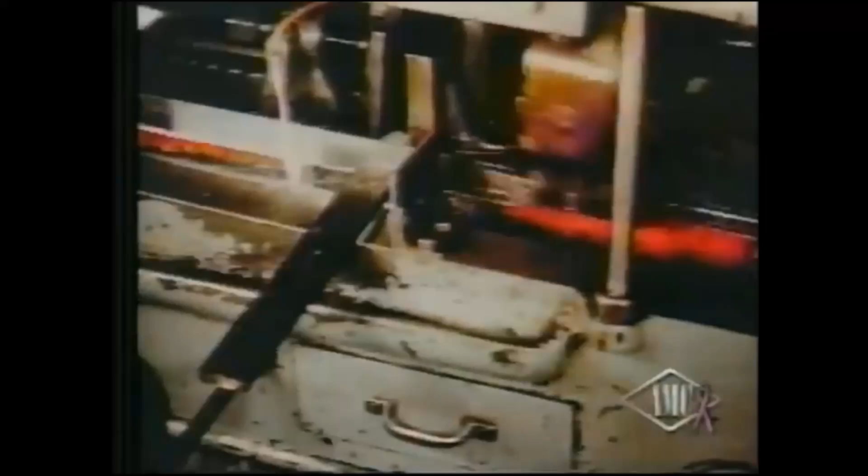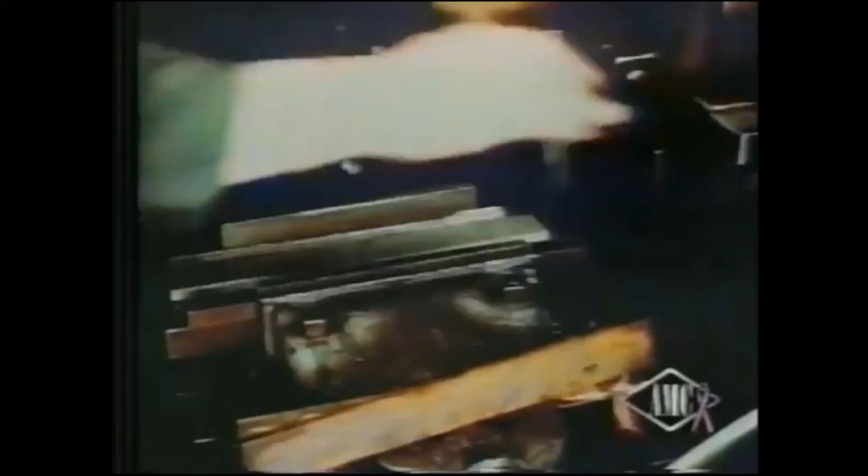Here, master machinists shape blocks of steel that made modern industrial science possible, for they are the world's standard engineering measure, the unbelievably precise Johansson gauge blocks. These operations may appear quite simple, but the cutting and polishing procedures demand utmost skill. The creation of perfect flat planes of steel is one of the greatest achievements of industrial science.

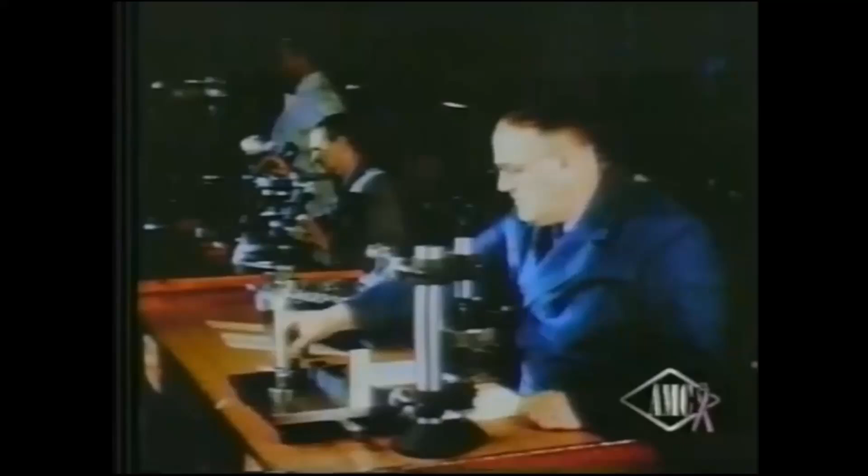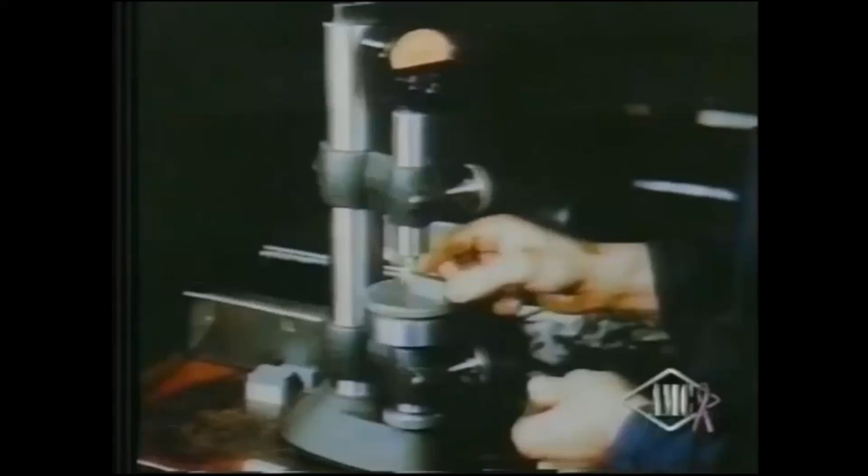Each gauge block must pass rigid spectroscopic tests and be completely perfect, for it is the final authority in all highly accurate measurements. This device, developed by the company's founder, detects an error of 1/25 millionths of an inch in these blocks, which check accuracy of gauges, making high-precision mass production possible.

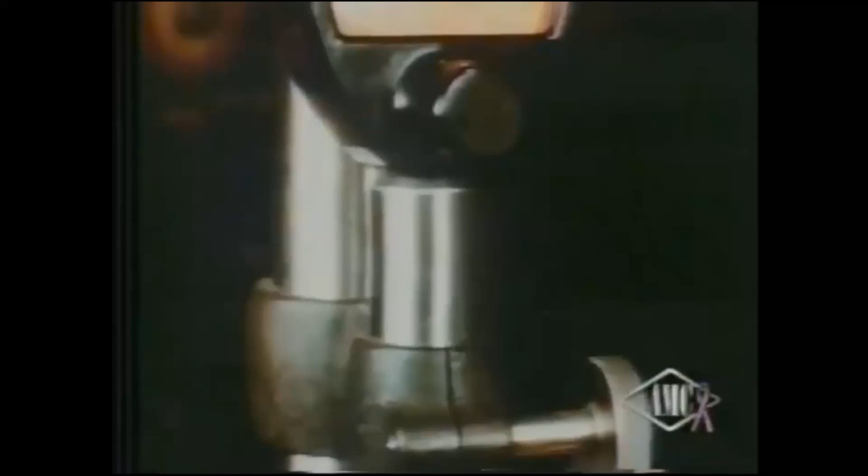Gauge blocks in various combinations are exceedingly sensitive to temperature changes. Here, a cylindrical gauge is being tested. Now the gauge is slightly warm, with this result.

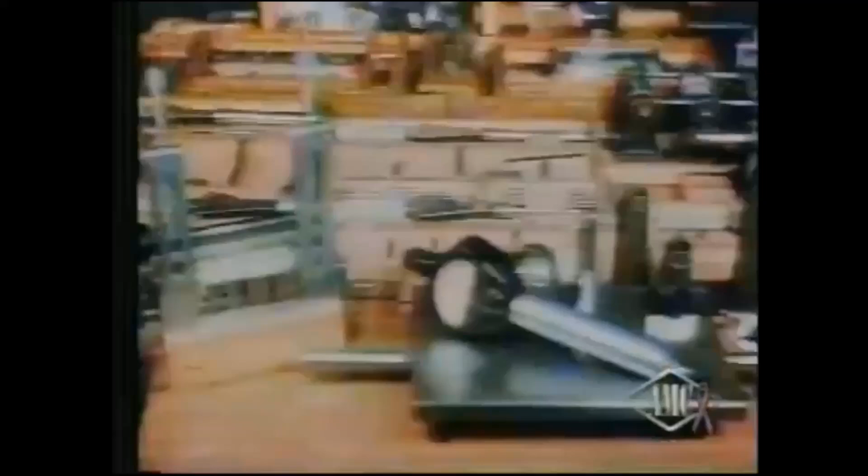This matched set may seem hardly more impressive than a box of children's blocks, but with them we have built our complex industrial world. Endless combinations provide all needed dimensions. Gauges of all types everywhere are tested with these blocks produced in a little Swedish town where half a century ago modern industrial science was born.

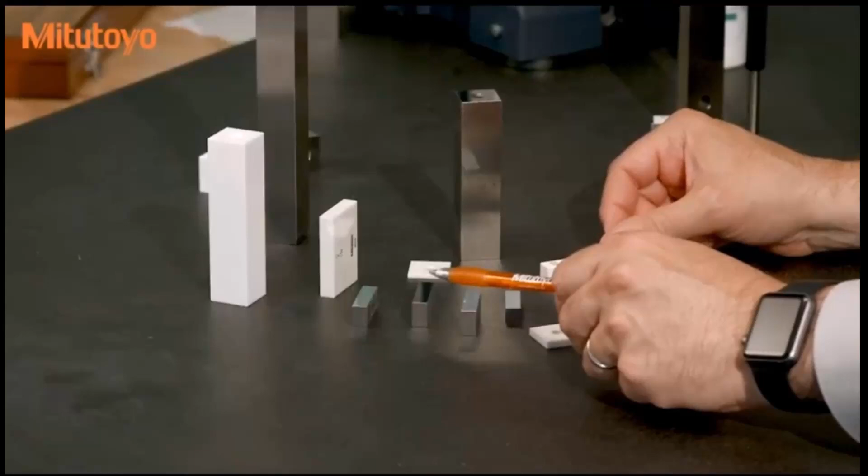So that's a brief introduction to gauge blocks. How do we use them? Gauge block faces are very flat and very smooth. The reason for this is that it allows gauge blocks to ring together.

Without using any adhesive, gauge blocks can be brought together and the flat, smooth surfaces will adhere to each other without causing any damage. When done properly, the gap between the two gauge blocks is somewhere around 1 millionth of an inch. And when you're done, they can be broken apart and reused over and over.

Any flat or smooth surface will ring together: steel to steel, ceramic to ceramic, even an optical flat, such as shown here. I've rung together 4 different gauge blocks: rectangular, steel, ceramic, and an optical flat. All 4 of those blocks are rung together nice and tight.

That's pretty neat. The idea behind Johansson's original patent was the particular sizes in a set of gauge blocks. They allow you to build an accurate stack of gauge blocks to create any length you need. So let's walk through the ringing process. When you ring blocks, you apply quite a bit of force. To avoid scratching your blocks, it's important that they are clean.

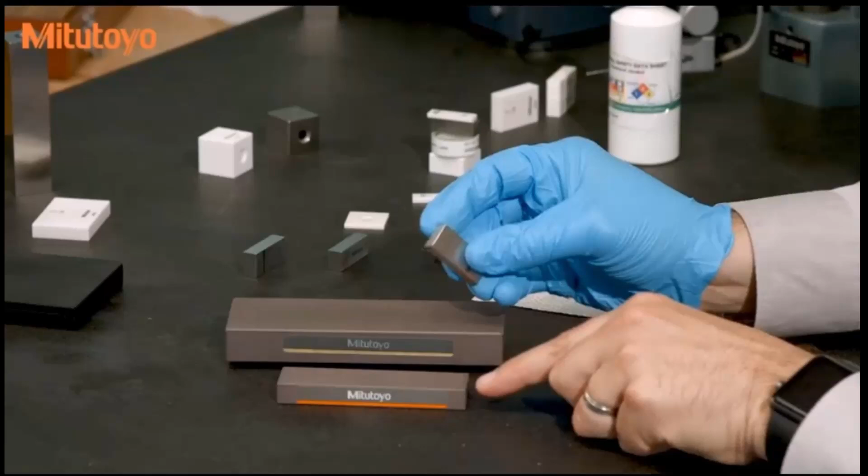First, I'll use some denatured alcohol to clean the block. Then I'll use this Mitutoyo Ceraston to remove any burrs. This is sometimes called conditioning the block. We're not changing the length of the block, we're just removing any high spots, particularly on the edges. I can use a small Ceraston like this, using a push-pull technique, or I can use a large one like this, and some people like to go in a figure-8 pattern.

No, you don't have to buy a Mitutoyo Ceraston, but they do work well. Some people recommend using a small granite surface plate.

It's hard to say how often you need to condition your blocks. It really depends on how you're using them. If you were to very lightly slide a gauge block across a surface plate, you may feel it catch or hear a scratchy sound that indicates a raised spot. In those cases, you should do the conditioning.

I'm also not going to pretend to understand the physics on why ringing works. I'm an engineer, I just need to know that it works and how to do it. In fact, it seems to be a bit debated as to why it really works. We'll leave that for the interested viewer.

What is important to know is that ringing works best with a very, very slight amount of light oil or grease on the gauge block faces.

We really don't use anything special in our lab for ringing. We have these 20-year-old stamp pads lying around that have some WD-40 sprayed on them. Yes, WD-40. I can only imagine the comments that will be posted on our use of WD-40. All you need to do is dab the gauge block in it and then wipe it off on a dry cloth. We don't use any solvent here because we don't want to remove the oil. We want just a little bit left on it.

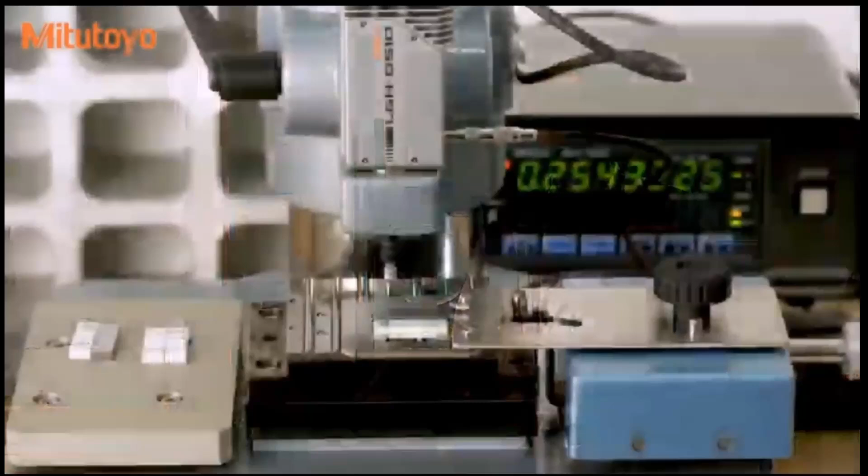Gauge blocks are usually calibrated using a comparison method. This is the master block and this is the customer block to be calibrated. We set the comparator using the master block.

And then measure the customer block.

In accordance to B89.1.9, the length tolerance for gauge blocks applies across the entire surface of the gauge block, not just at that gauge point. The standard discusses the importance of checking the size in addition to the gauge point at all four corners. This fixture moves the gauge block around so we can measure the four corners quickly and easily.

In order to state conformance to grade in accordance to the ASME B89.1.9 standard, all 5 of these points must be in tolerance.

Gauge block calibration practice in the United States is sometimes a bit sloppy. To save calibration costs, some people have been convinced to go with a single point calibration, where the corners are not checked at all. The only time that's acceptable is when you're only using the gauge block at that exact measurement point, and I think that's pretty rare.

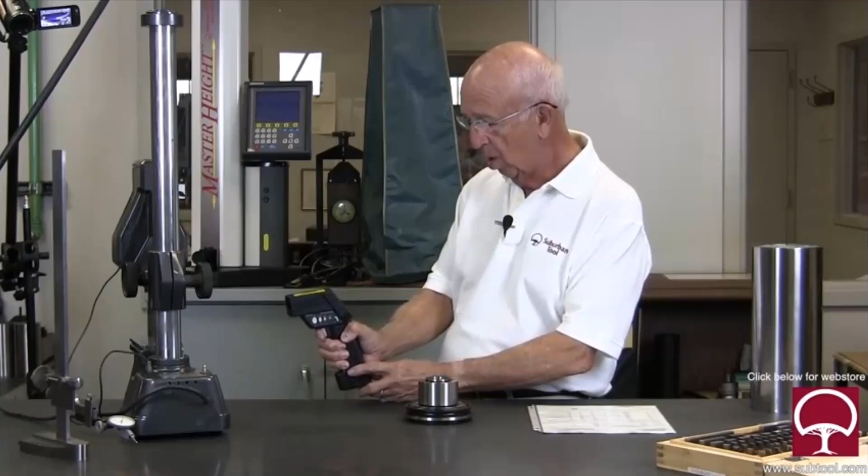So he came out, he took a temperature gun like this, and he said, "Let's take a look and see what the gauge blocks are at or what they should be." And Jim, can you see this? Okay, good. Now let me check the temperature of the gauge block that's stabilized. Can you check that one, Jim?

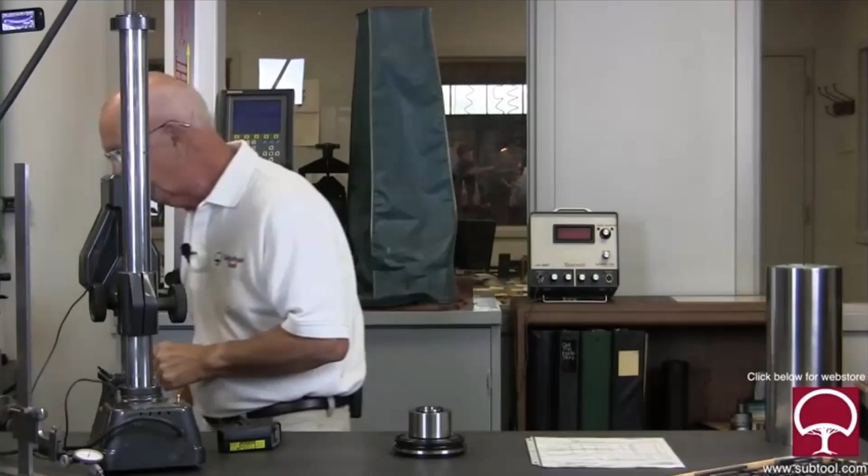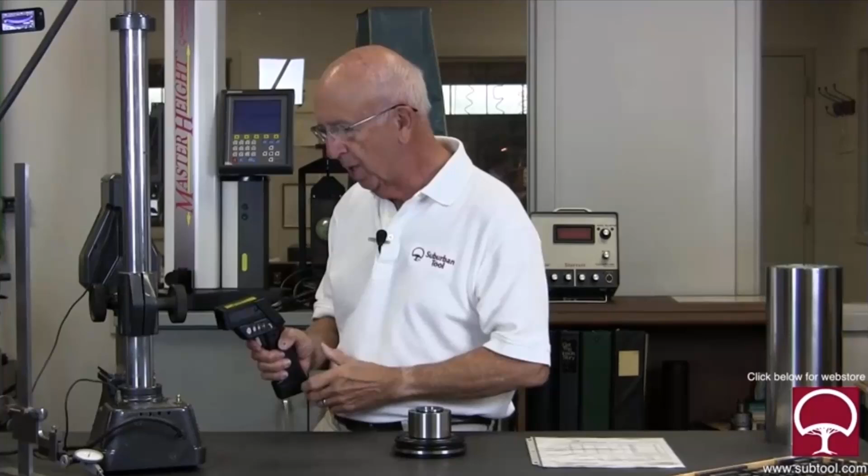All right, so you can see there's a difference in the temperature. The difference in the temperature is approximately 8 or 10 degrees, I think. And that little difference, I'm going to show you the difference here. This is the correct set of gauge blocks.

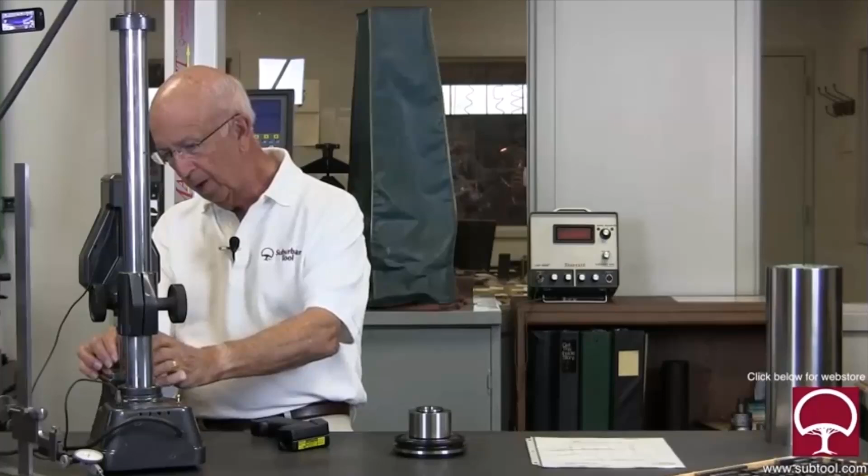That's on 0. This is a set that's warm, and there was no compensation made for deviation. So you can see that's 2.5, correction, 1.5, almost 2 tenths. So the difference between an accurate set of gauge blocks, which is what my boss used, and the stack that I used without compensating for deviation and without compensating for temperature, took 1.5 of my 2 tenths tolerance away.

Plus my part was warm. So add that all together, and I ground those parts undersized, 2.5 to 3 tenths. So I was out of tolerance. Why? Again, not taking into account the temperature, not taking into account deviation, not taking into account the temperature of the part that came off the machine that perhaps was a little warm from grinding.

So that's how important it is to make sure you use the deviation chart and you stabilize the temperature, make sure it gets down to ambient temperature so everything is the same, when you're working within a couple of tenths like that on larger parts.

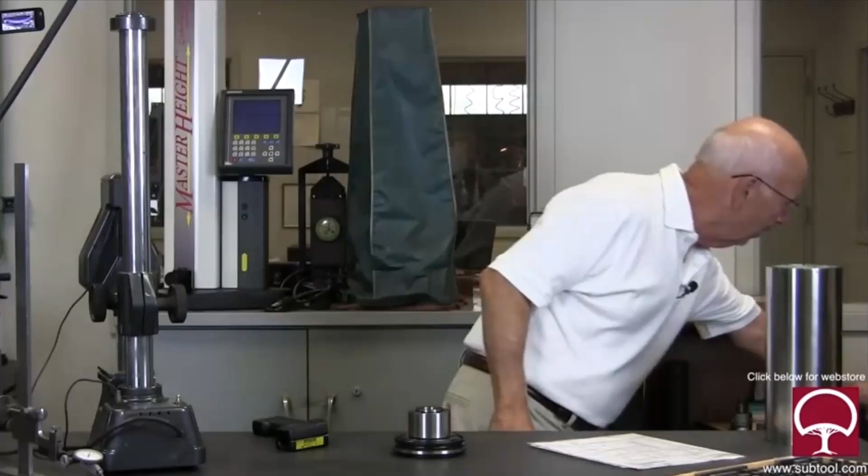Now you're working with smaller parts, such as this one. It's still going to be important, but it doesn't have the mass, so it's not going to grow as much. This part's going to grow much more because it has more mass. So pay attention when you're grinding within a couple of tenths. I don't care if it's flat grinding, cylindrical grinding, ID grinding. Pay attention to temperature and pay attention to the deviation chart.

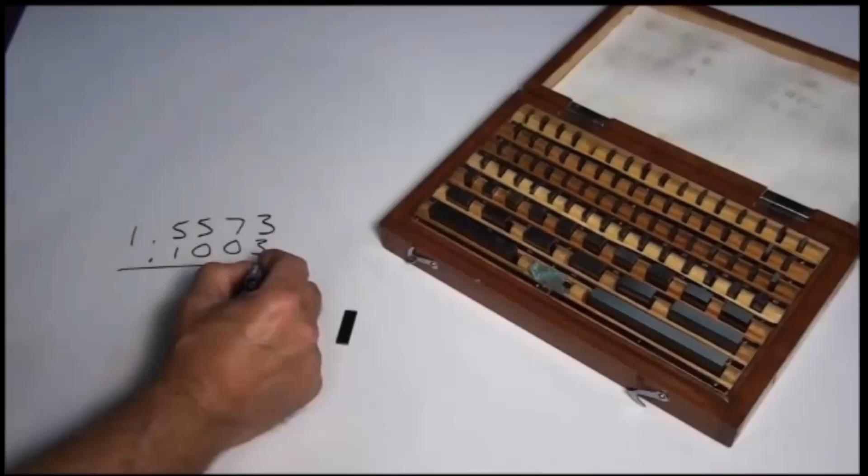Do subtraction. 3 minus 3 is 0. You can see we got rid of that rightmost digit. 7 minus 0 is 7. 5 minus 0 is 5. 5 minus 1 is 4. That leaves us with 1.457 inches.

Look at this right digit again. It's a 7, in the 3rd decimal place over. That makes it 7 thousandths of an inch. There are no 7 thousandths thick blocks in here, but there are 0.107s. Remember, all these center blocks here are 0.101 through 150. So there should be a 107 in there somewhere, right about here. Let's write that one down, 0.107. Do the math: 0, 0, 5, 3, 1.

That leaves us with 1.350. Remember I said these middle blocks here are 50-thousandths increments, so there should be a 350 in there somewhere, and sure enough, 350. Let's write that one down. Subtract: 0, 0, 0, 0. Leaves us with 1 inch. The upper blocks are 1 inch increments, starting with 1 inch.

Okay, so we got our 4 blocks. Hopefully we stack these up, we'll get 1.5573. Alright, how do we make a stack of gauge blocks? Well, first thing we do is clean all the grease off of them. I like to use alcohol, it's a little easier on your hands than petroleum solvents. So wipe all the grease off of them. As I said before, all my blocks are stored well greased so they don't corrode.

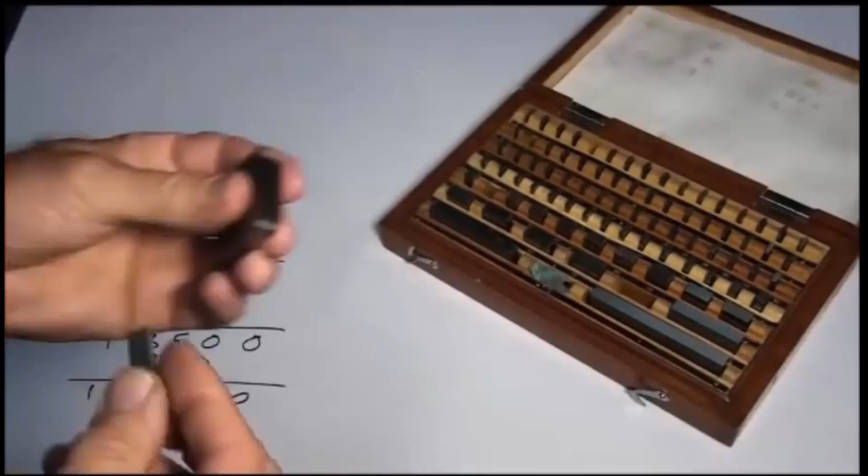Ring the last two together. Alright, that gives us a stack of gauge blocks.

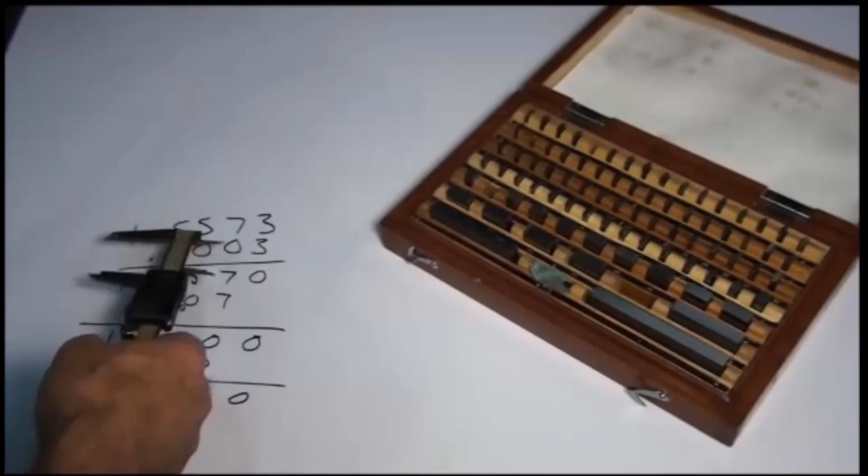I always like to just check them with a pair of calipers as a little sanity check, see if my math is right. 1.557 - okay, we're going for 1.5573. I think I'd trust this over this.

Okay, so that's one example. Let's clean up the board here and take a look at another example. It really needs some dry erase markers, I think.

Suppose we wanted to build a stack of gauge blocks 1.5873 inches tall. All right, same as before, we'll look at this right digit.

It's the 3/10,000ths place, so we'll use the 0.1003 block - that's this one right here. Write down 0.1003, do the math, leaves us with 1.487. Now there's always an exception to the rule.

Okay, this time we're going to have to do it a little bit differently than last time. Remember I said these center blocks in through here are all in 50-thousandths increments - that's 0.05. So if we look at this second decimal place here, when we choose the block to wipe out this 7, we have to keep an eye on the second place. We want to make this turn out to be either 0 or 5 - a 50-thousandths increment.

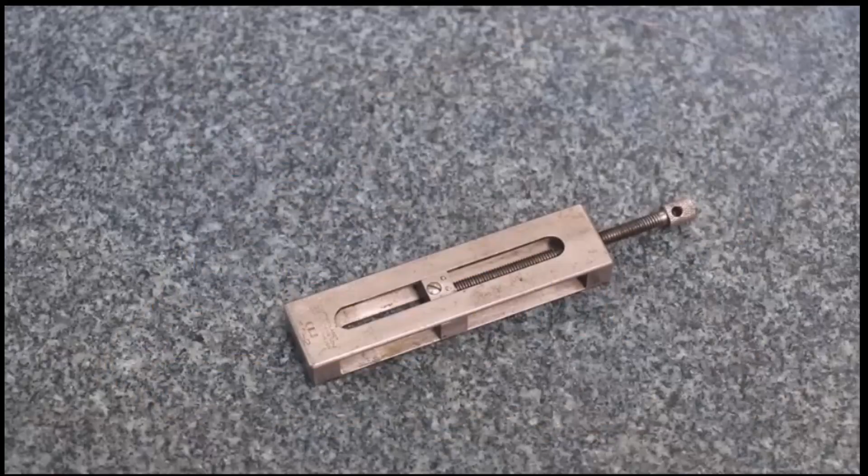So what I'm going to do is put together a little stack here and show you how that would have been used. Let's start with something simple. These tools here, and there's several of these in different lengths, are basically just to help hold a stack together so they don't fall apart. Now in theory, you should be able to ring these together—you squeeze them together and the surfaces are so flat that they stick together. Mine are not as flat as they probably should be. Some of them will ring, some won't.

In this case, let's just say we wanted to make a stack that was 1.5 inches. I'm going to do something really simple here. This one is a 1 inch one, this is a 1/2 inch. You put them together, it's 1.5 inches. So what you can do now is just take the stack, open it up a little bit more, put the stack in the holder here, open it up a bit more, and clamp them down together. And now I have a very precise standard here that's 1.5 inches wide.

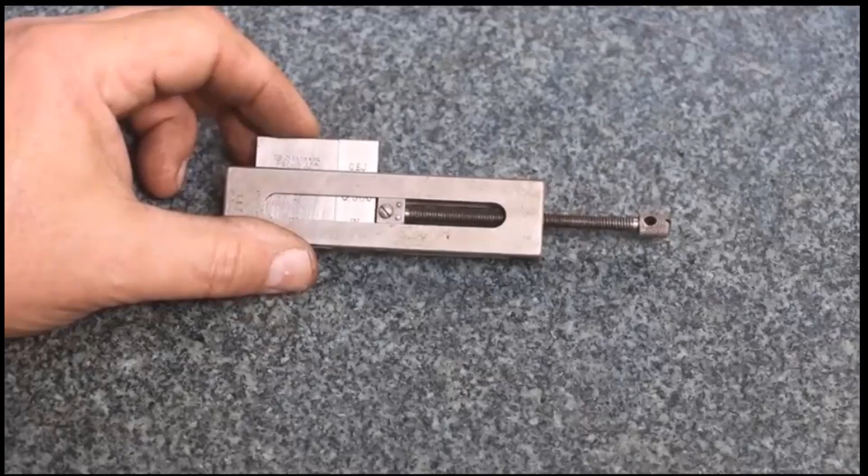Just to verify that, I'm going to take my calipers. We'll come in here, and it's right on the money, 1.5 inches. You could use a micrometer to measure that—it'd be more accurate, I'm just using the dial calipers because it's easy to show. But let's say you just needed that as a reference. Now you've got that stack, and you can put a lot of different gauge blocks in here to get a very precise stack. That's probably the simplest way to use it, but you can also use some of these special ends in here to do some even cooler things.

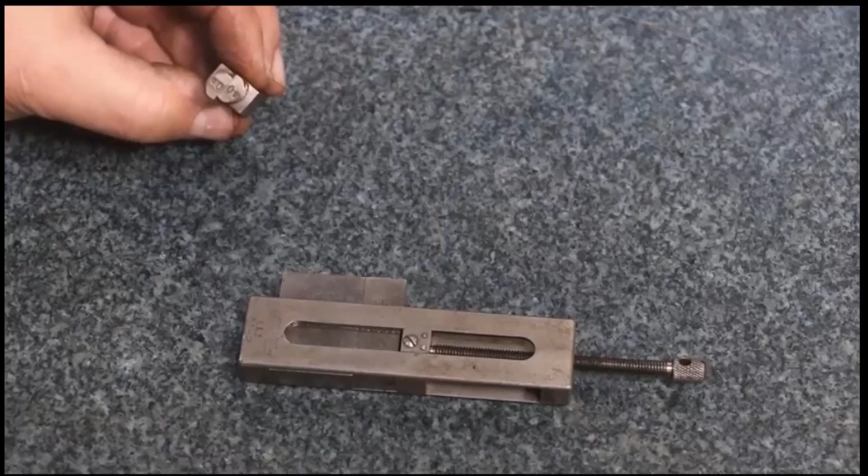So you've got these ends here. There's actually several different versions of these, and if you look, they're round on the ends like such. Now what I can do with these is use this. Let's say you had a hole that needed to be exactly 1.9 inches in diameter that you were boring in something, and you needed a way to measure that with a super precise setup here. I picked 1.9 because I've already got 1.5 inches. These, if you look on the end, you see it's 0.2, so each one of these is 2/10 of an inch thick, and to verify that, we'll just use our calipers—2/10.

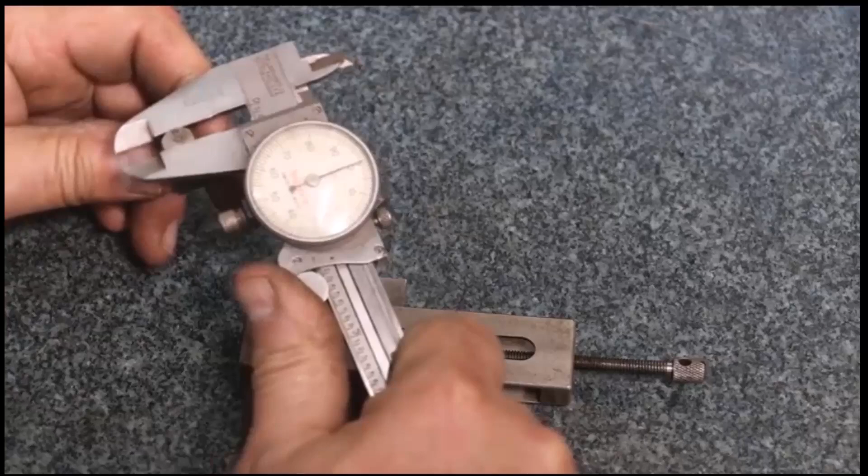So I'm going to take this stack apart. We're going to put these on either end. We'll take this one, put it on the bottom. We'll take this one, put it on the top, like such. Now I can go over to a hole and see if that fits.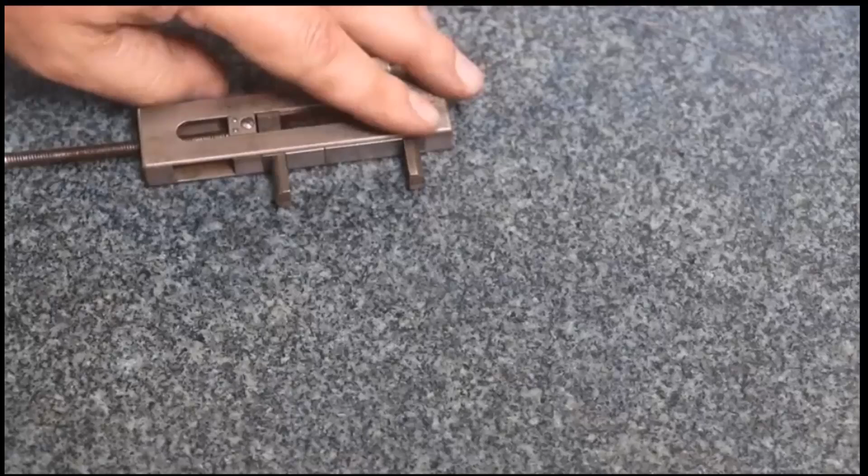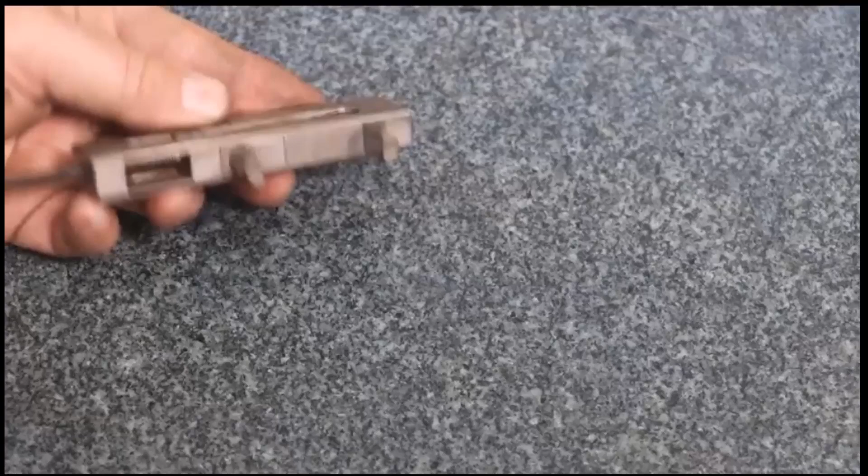Now, probably what you would have done is had multiple stacks. Usually when you're doing something precision like a bore like that, you would have tolerances—it would have to be within a range. So let's just say we're at 1.9 inches plus 0 minus 5, or 5/10 thousandths or whatever. You come up with 2 stacks and you could check it with a go, no-go gauge. Basically, if one of them fit, it was a go; if it didn't fit, it was no-go. So you could use this for doing inspection work by setting up a couple of different stacks with different measurements. That one's for doing an inside hole measurement, and you could just run it in there.

Again, two stacks. You see if it fits or it doesn't fit.

Next thing we're going to do is show how to turn this into a height gauge for making very precise height measurements. There's all kinds of height gauges that are adjustable, moving up and down, but this is a case where you wanted something really set up super accurate using the gauge blocks as a reference. You would use this stand here, and first thing we'll notice on here, it says 1.375. It tells us how high. Basically, this stand becomes a gauge block.

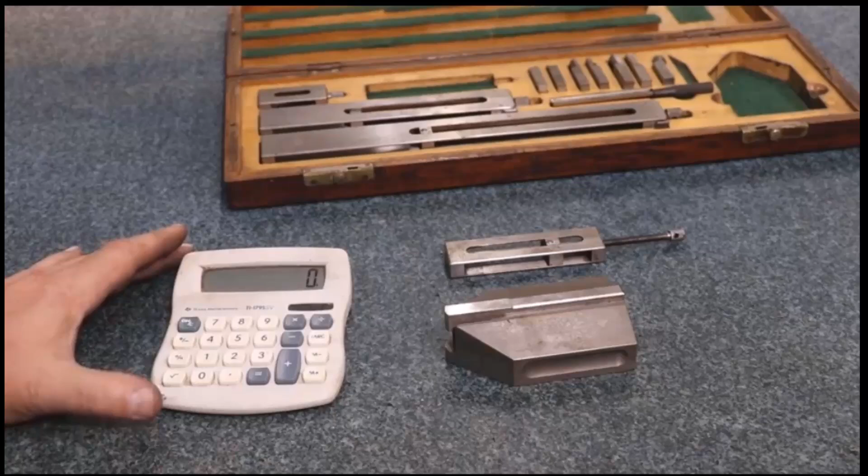Let's say I want to put a scribe at 2 inches high. I'm going to get a calculator to make this easier. I'll put in 2 inches and subtract the 1.375. That tells me I need to put 625 thousandths in there.

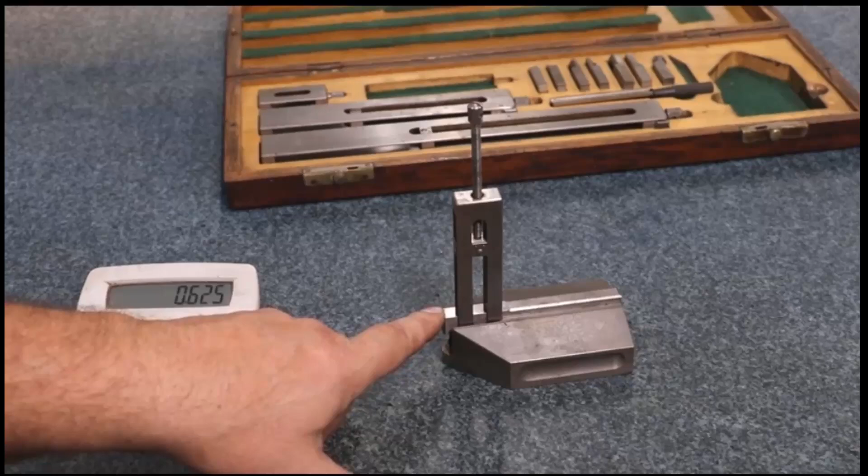First thing I'm going to do is take my little holder here. There's just a little spring clip on the bottom. It goes in there. That height I just told you, the 1.375, is from here to the top. We can start stacking our gauge blocks on top of that. So if I want to go to 2 inches, I want to really start out here on the end to get my measurements.

I got 625 thousandths, so I'm going to grab a gauge block here. The 25 thousandths is too thin for a gauge block, so this is 125 thousandths. I'm going to subtract that out: minus 0.125 equals half inch. So now I grab my half inch gauge block, and when I put all these together inside over here, it's now 2 inches up to the top.

So 2 inches from the plate up to the top. I will finish by just putting in a little scribe here. The scribe is flush on the bottom, so the point down here on the end is going to be the same height as the top of the gauge block. We tighten it all down.

Now I have a 2-inch stack for a height gauge, and then I can go over to another piece of work—I'm not going to actually do it—but scribe a line on there if I'm doing a measurement, or if I need to come in there even and measure across the top of something, I can sweep it and see if it's at least below that.

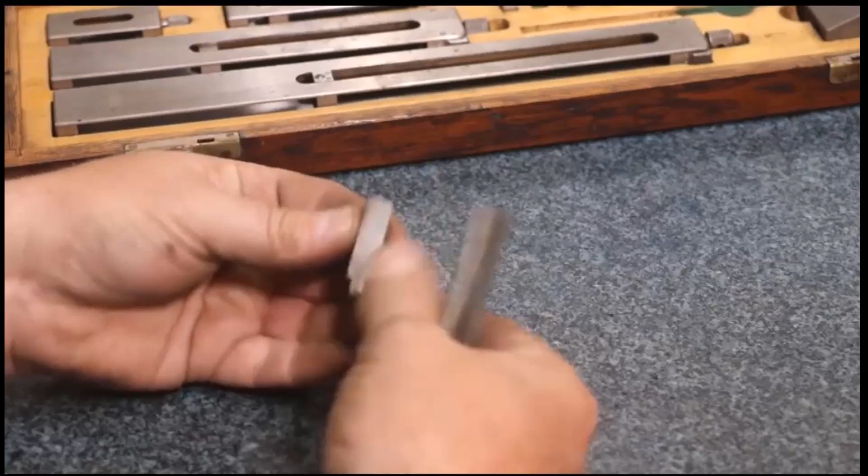Another tool that's in here is this little scraper. This is a little triangular shaped 3-sided scraper, and basically what this is for is to come in here and scrape the top of your surface—not trying to remove metal, but a lot of times you would use grease on these gauge blocks to help them wring together. So you can just use this to quickly get that surface cleaned off and flat again, and at the proper height. That's also included in the accessory kit.

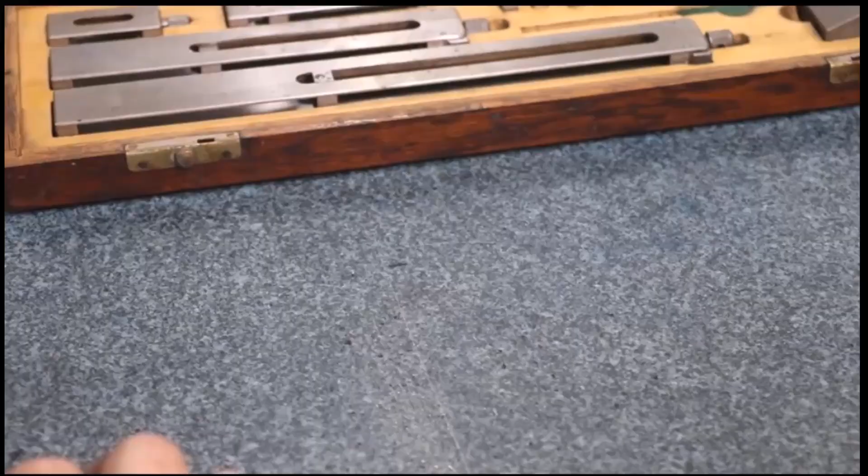So there you go, just a little bit about the Johansson gauge block accessory kit. These are out there, you can find them. You see them come up for sale on eBay from time to time. I don't recall where I got mine—this may have actually been an eBay purchase at one point in time. It seems like I remember purchasing this off eBay, or I may have got it at an auction or someplace else. I really don't remember, but they do come up. I wouldn't say they're super common, but if you look for them, they're out there. And probably by me doing this video, the price just went up on them. That seems like the way it usually works.

But anyway, I had a viewer ask about it, how it was used. And guys, I am quite sure that there are probably many more ways that you can use this than what I just showed, but those are some of the ways that I know how to use it. I have used this set for doing exactly the kind of stuff we just talked about.

Well, there you go guys. Just a little quick video on how to use the gauge block accessory kit and a little bit about gauge blocks in general. These are extremely handy tools to have in the shop, particularly the gauge block set. I use these a lot. Probably the biggest thing I use them for is when I'm setting up a sine plate. If I'm over on the grinder or something like that, I can use a sine plate to get a very precise angle. I can calculate a stack that needs to go up underneath that, and I use the gauge blocks to set that sine plate with.

But they have so many more uses, particularly when you start getting down and doing super precision work to the ten thousandth of an inch level, you need to have some of these just as references to use in the shop. Very critical to have that, and tool and die makers really rely on these quite a lot. Honestly, most of the work I do is probably not to the level of precision that I need these for, but every now and then jobs come in that you need them for.

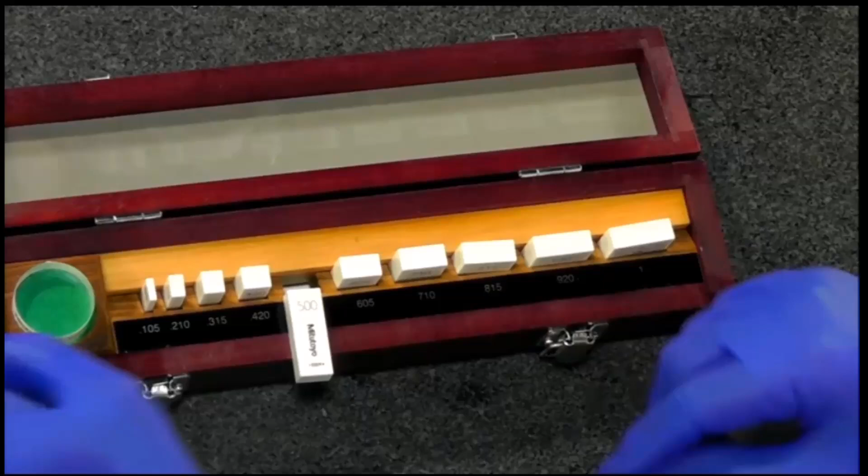The dimensions printed on the blocks, black on white, out on the shop floor, especially with my eyes, sometimes trying to find the number, you've got to keep rotating it back and forth, get the light to reflect off it just right. See, just right — with this one, you have no doubt what block you're dealing with.

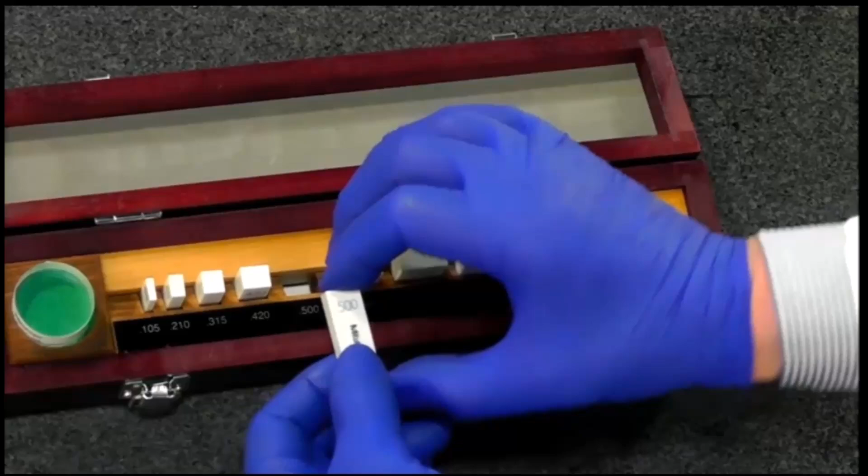These are fantastic, but you have to be very careful. You don't want to drop them. But will they — I think a ceramic plate, if I drop it, it's going to shatter into a million pieces. Right, these are not that. These are very durable. They've made them so they can survive the shock of being dropped. We don't recommend that, that's not good practice, but if it happens, your 1-inch block won't end up as 300 thousandths blocks. They will not shatter or break.

They're non-magnetic, which is another advantage of ceramic. Steel gauge blocks can become magnetized — we have to demagnetize them occasionally when we calibrate. They can attract chips and metal flakes. These won't attract anything. The grain structure is very tight and dense with ceramic, so they tend to ring better together. When you're ringing them, they'll ring a lot easier than steel ones, and the contact is much tighter.

Now, when you ring gauge blocks together, it's always advisable at the end of the day to pull them apart. Why is that? If there was any contamination, especially with steel gauge blocks, they can oxidize, rust, a number of different things — if there's any coolant, that sort of thing. Also, dimensionally, I don't have the specifics, but I know NIST never recommends ringing if you don't have to, so surely don't leave them that way.

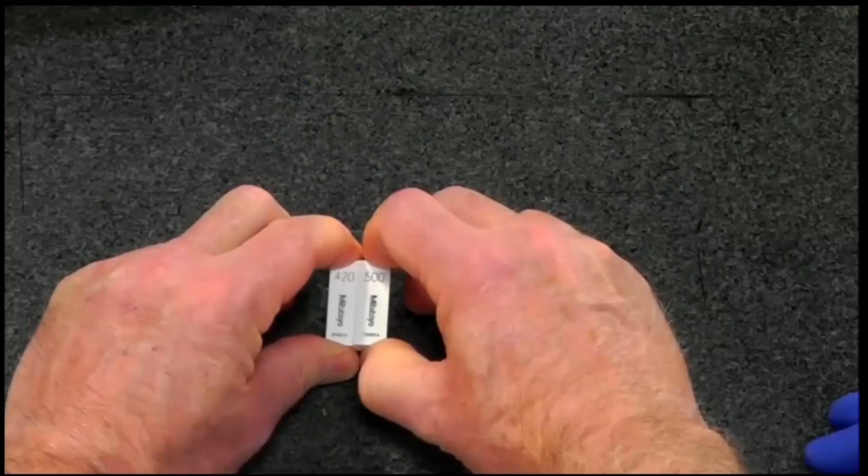Oh man, you can do it, but it takes quite a bit. And actually, the thing that's weird — wow, those are really... The only way to get them apart was to slide them apart. Now, oh, I'm sorry, you said I could drop these. Watch your head.

Let me see if I can ring them together. Wow, that rung! I've never worked with ceramic gauge blocks, only played around with the steel ones. Boy, those just snap together almost like Legos. Just about — so that's why you would choose this specific set of blocks.

I'd like you to discuss why you should always use gloves when handling gauge blocks, particularly maybe steel ones. Two major reasons: mostly there would be heat transfer from your hands, and we'd normally use cotton gloves in a lab. Under the lights here, heat transfer wasn't going to be too significant. The other part is the oils in your skin — a lot of people have very acidic skin oils. We'll find it on our precision tools, and some of you have seen it probably on your lathes and mills, where people rest their hands, it'll actually rust in that area. You get that on a different level with gauge blocks too.

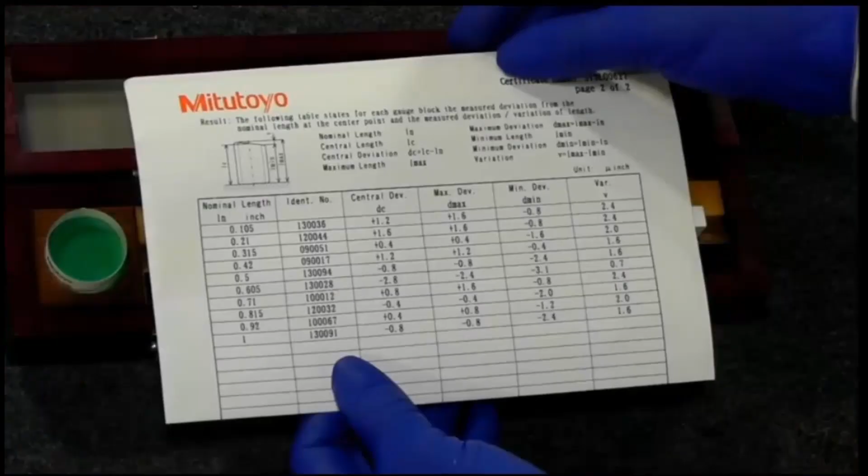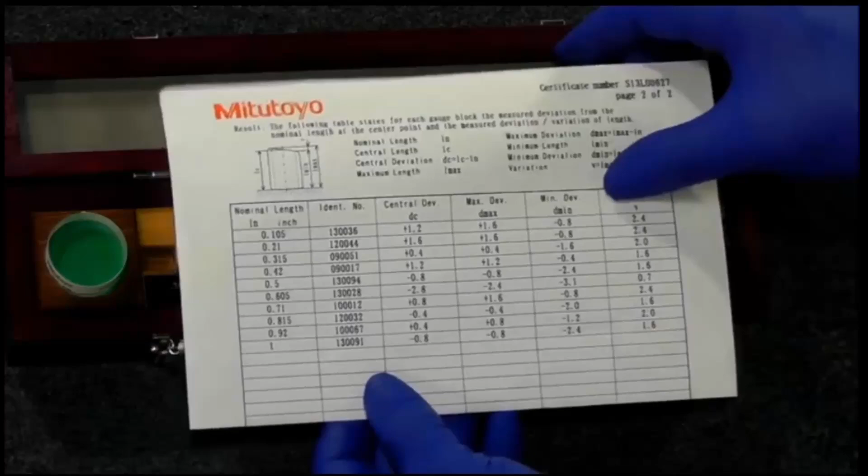Mitutoyo also provides an inspection report that shows all the different dimensions of these, so you know exactly how far off they are, the total variation on the block. Mitutoyo just does an excellent job with this. So when you're at the point of actually applying these, you'll know exactly what they measured. So there you have it — that is a Mitutoyo ceramic gauge block set up specifically for micrometers, but you can also use it on anything that needs different levels of checking within an inch.

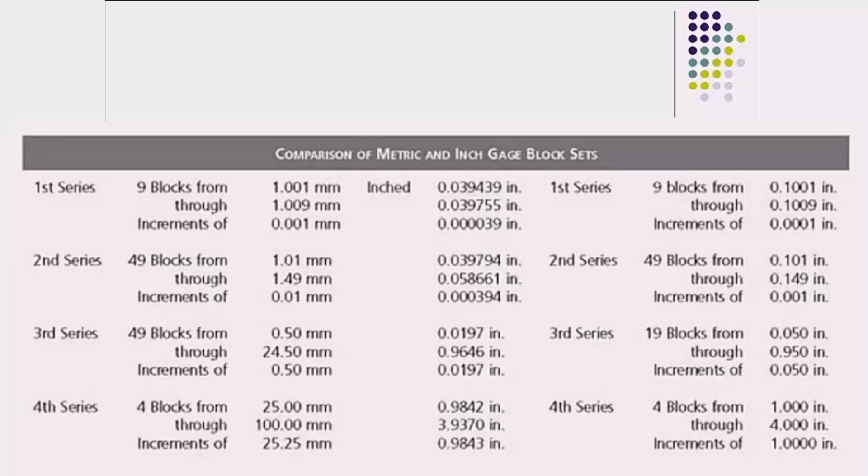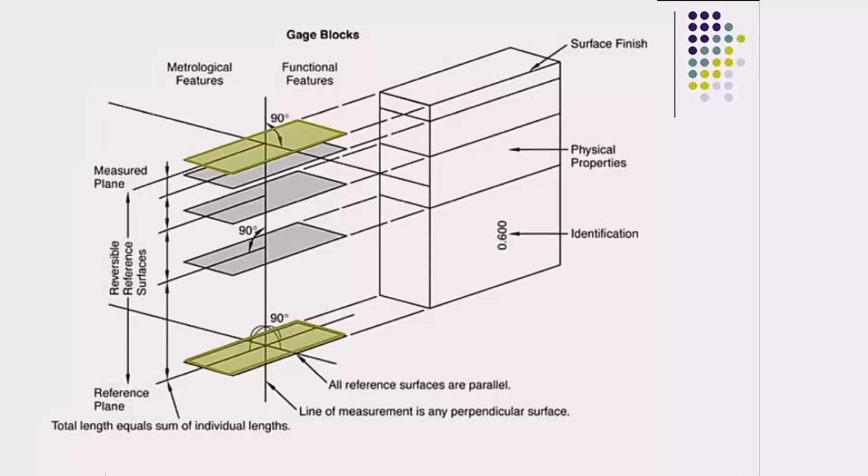The gauge block's key points are that they have a reference plane and measure plane. It's no longer a reference point and measure point, it's a reference plane and measure plane. Also, it doesn't matter which one you start with. You could flip the blocks over and have the opposite end be the reference plane and the other end be the measure plane. That is why it's referred to as reversible reference surfaces.

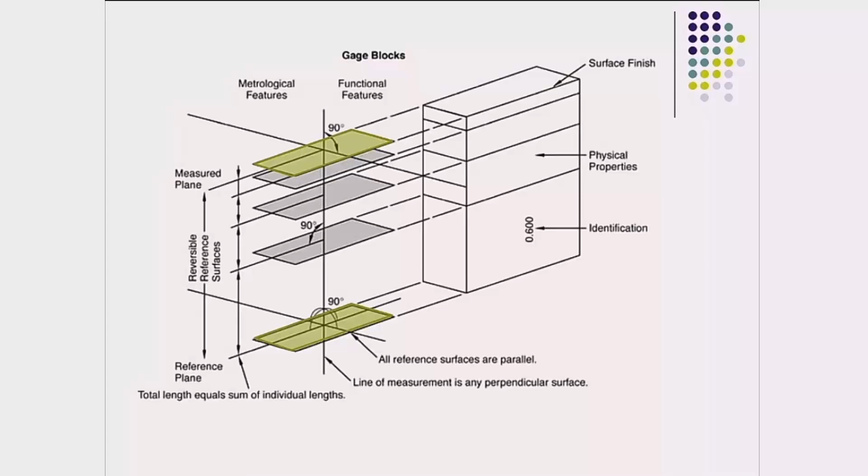What's key about gauge blocks is that the line of measurement is any perpendicular surface, and the surface finish is critical for the gauge block.

Using Johansson's patent, 111 blocks in 4 series can combine to form any dimension from 2 mm to 202 mm in steps of 1/1000th of a millimeter, or a micron. That's a total of 200,000 combinations.

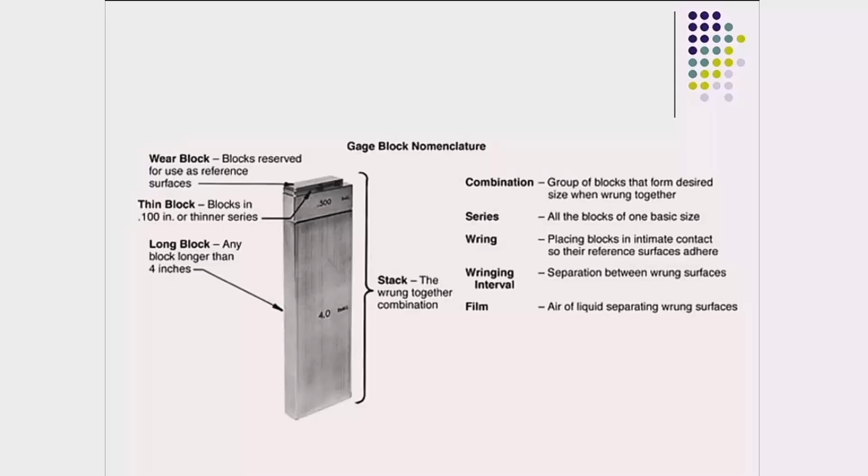Key gauge block nomenclature: you have long blocks, which are any blocks longer than 4 inches. Thin blocks are blocks in 1/10th of an inch or thinner series. And then you have wear blocks that are reserved to be used as the reference surfaces, so you don't wear the other blocks during use. These wear blocks can be changed out without having to worry about changing out all of the other incremental blocks. A group of blocks rung together is referred to as a stack.

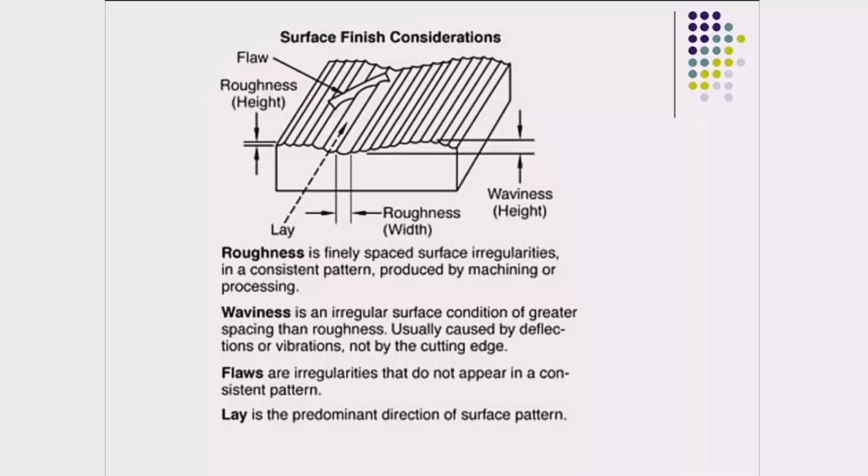Another key feature of the gauge block that makes it so precise is the surface finish. Surface finish considerations are roughness, which is a finely spaced surface irregularity; waviness, which is an irregular surface condition of greater spacing than roughness; and various flaws, which are irregularities that do not appear in a consistent pattern, such as a dent, nick, or burr. The lay is the predominant direction of a surface pattern.

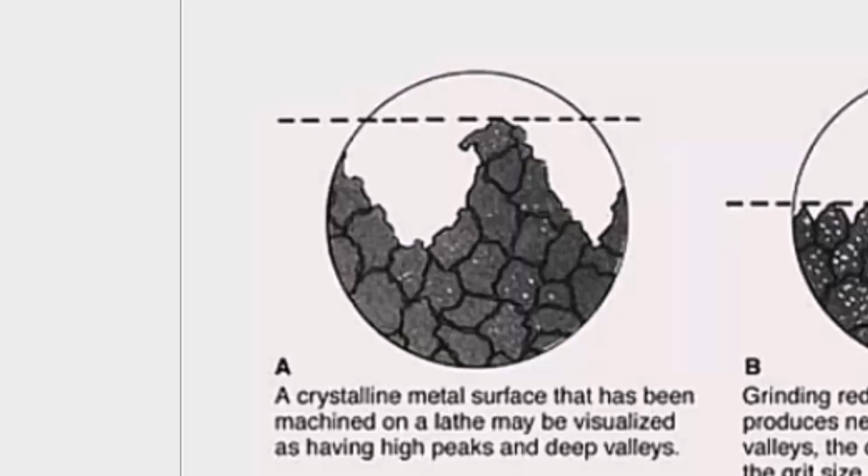To make a surface finish adequate for a gauge block, first you have to machine the surface. In diagram A, we see that a crystalline metal surface that has been machined on a lathe can be visualized as having high peaks and deep valleys. Certainly not good enough yet to be used as a gauge block.

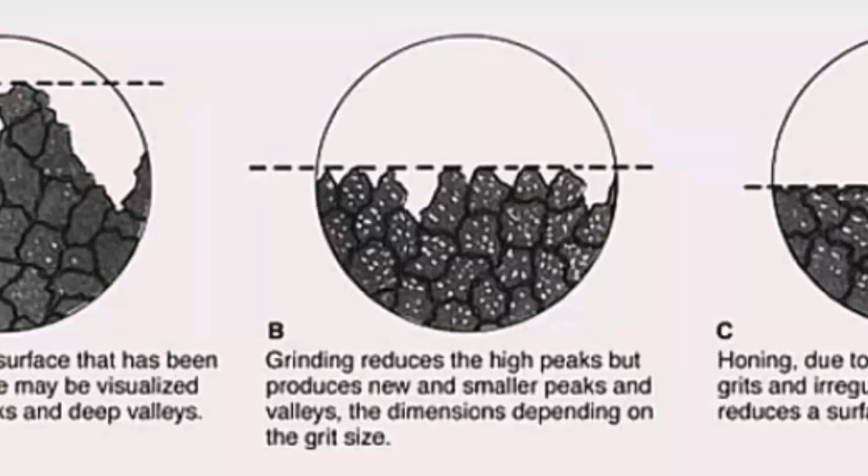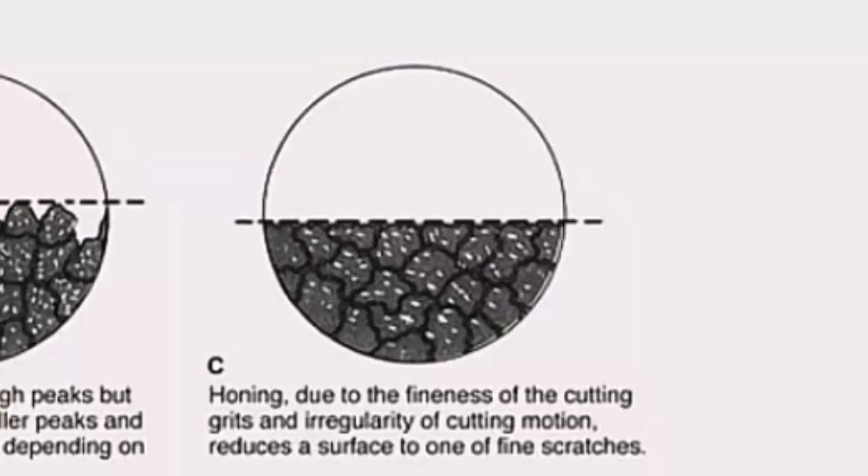In diagram B, you go through the grinding process, which reduces the high peaks but produces new and smaller peaks and valleys, the dimensions of which depend on the grit size. In diagram C, we go to honing. In honing, due to the fineness of the cutting grits and irregularity of the cutting motion, it reduces a surface to one of just a variety of fine scratches. But still, it's not adequate for a gauge block.

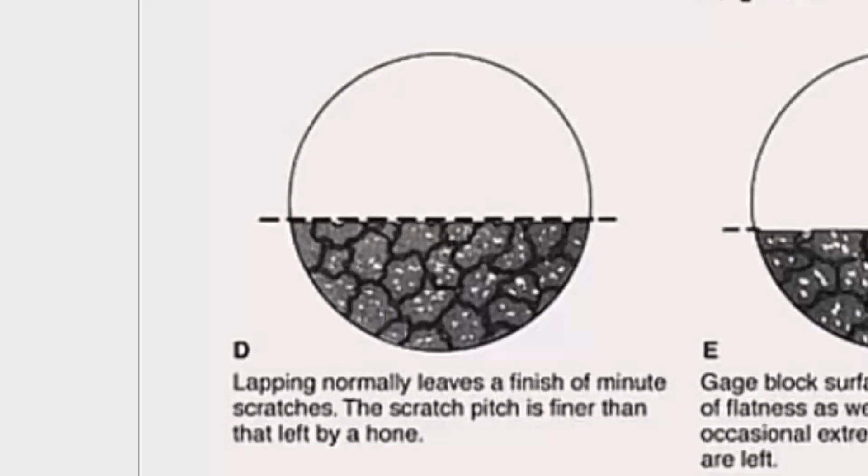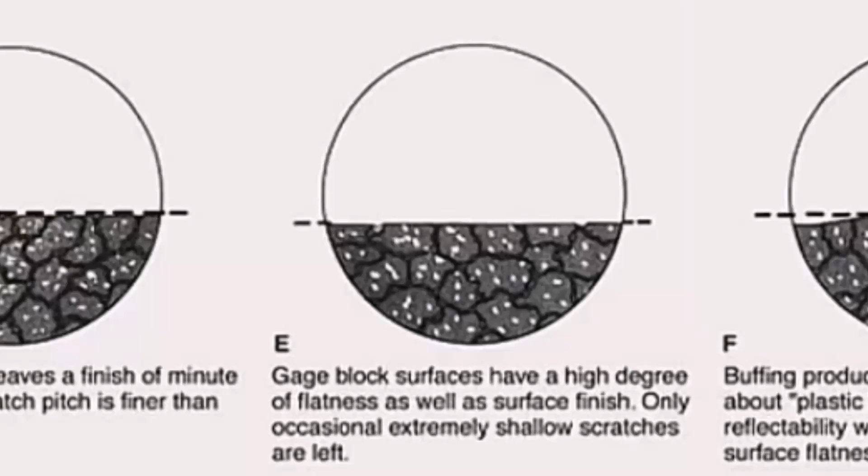The next process is lapping. Lapping normally leaves a finish of minute scratches. The scratch pitch is finer than that left by a hone. Gauge block surfaces have a high degree of flatness, as well as surface finish. Only occasional, extremely shallow scratches are left that won't affect the dimension.

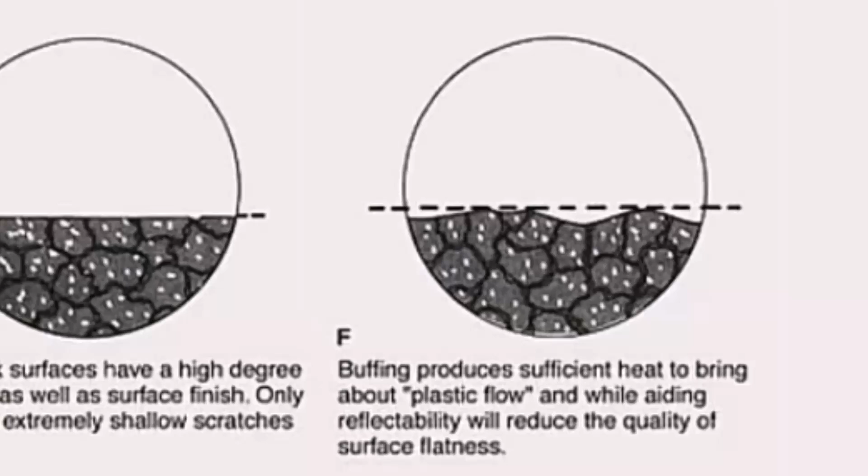However, if you try to fix a surface by buffing it, you can actually destroy that flatness. Buffing produces sufficient heat to bring about a plastic flow, and while aiding reflectability, it will reduce the quality of the surface flatness. That means it'll look great, but it'll be much worse as far as its functional use.

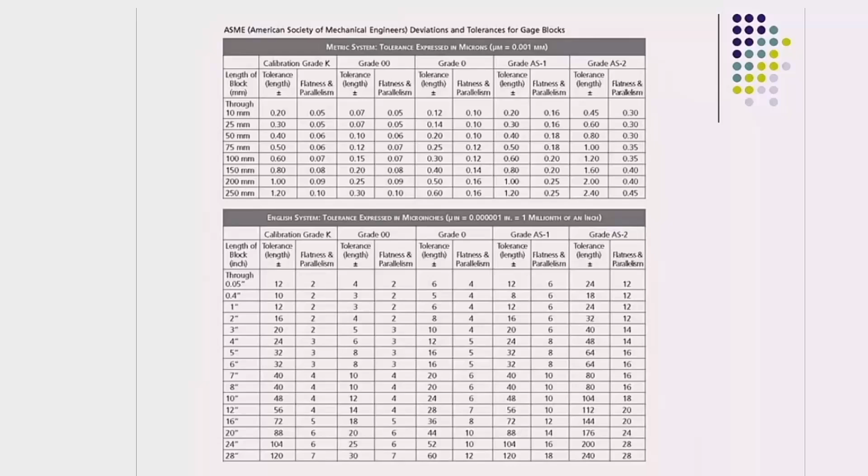Gauge blocks come in a variety of grades, from calibration grade to work grade. These are charts that describe the tolerances for each of those grades.

How do you calibrate a gauge block? What is calibration? It's a verification that the block is within a specified tolerance. How is it done? By comparison to a master standard of known calibration and known traceability to a national length standard in America, which is NIST.

When is it done? Periodically, according to a systematic program based on statistical quality control. It's done not less often than annually for grade AA, quarterly for grade A, and semi-annually for grade B, when required by visual inspection, ringability decline, or slipping quality control level.

Who calibrates the working sets? The user's gauge department, or any facility for calibrating master sets, may have the capacity to calibrate working sets.

Who calibrates the master sets? Those are sent out to independent metrology laboratories or manufacturers of gauge blocks, and they are traceable to NIST.

What is done with a gauge block that is too worn to be used? It's replaced. You can't adjust it, you can't fix it. It has to be replaced.

What happens when you have an entirely worn set? They may be regraded for a lower level of precision. For example, an AA set may end up being a B set.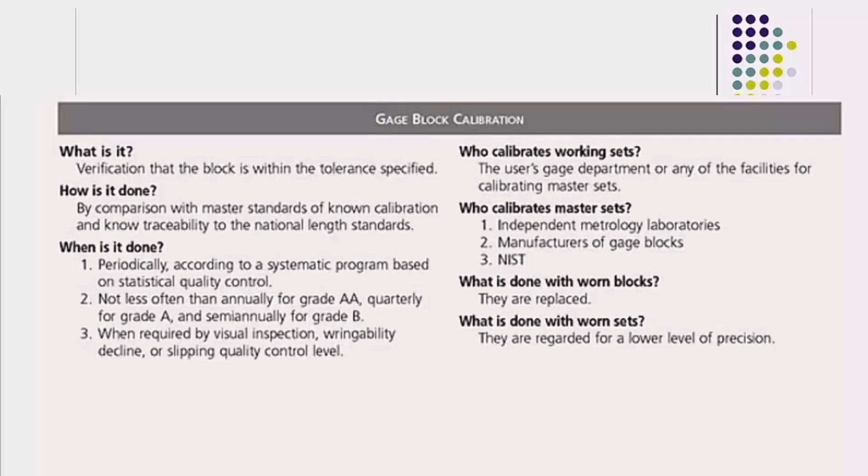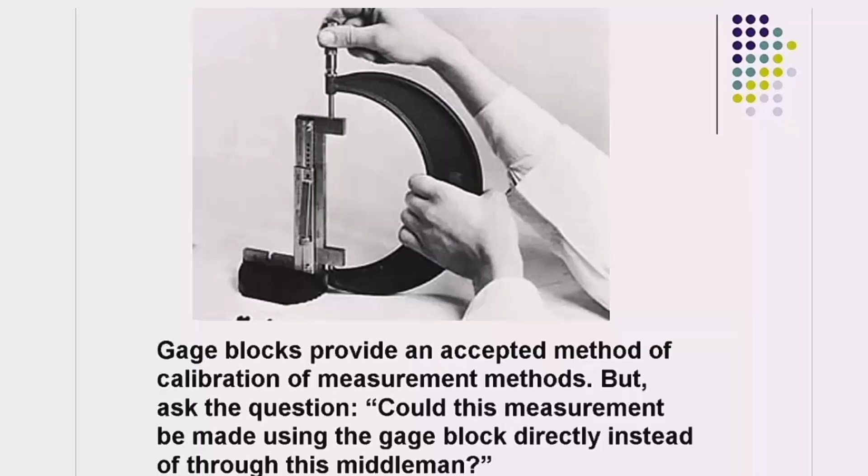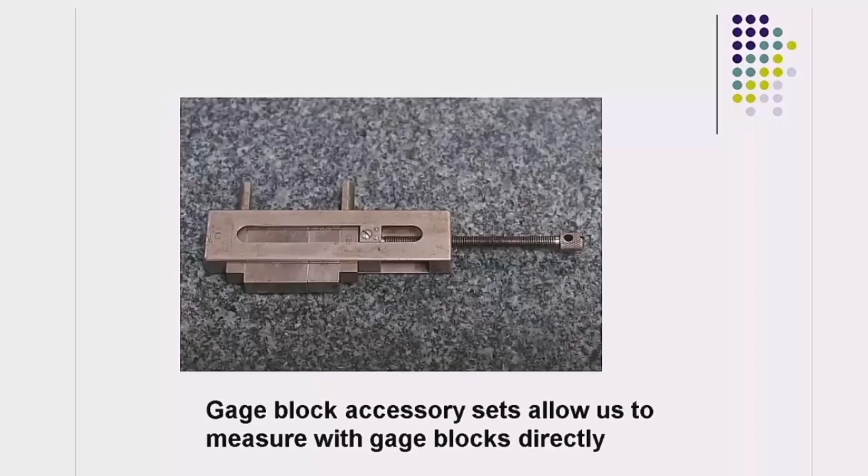Gauge blocks provide an accepted method of calibration of measurement methods. But ask the question: could this measurement be made using the gauge block directly instead of through this middleman? In order to do so, you need to use the gauge block accessory set seen in the previous video that allows us to measure with the gauge blocks directly.

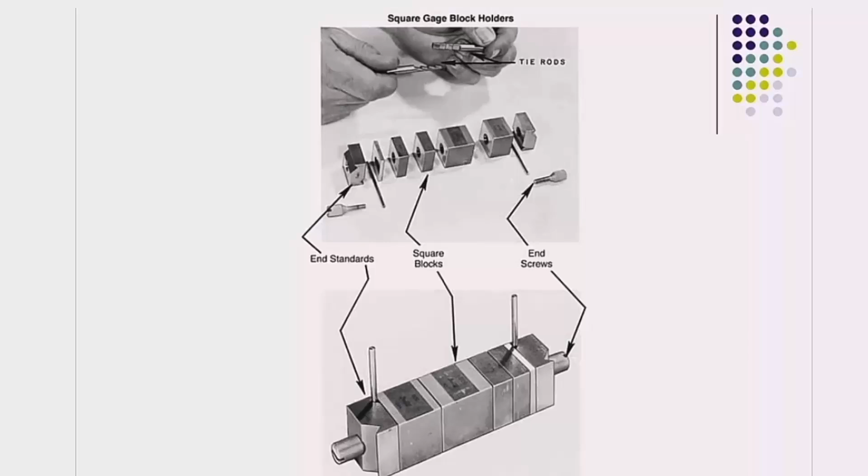Here's a variety of accessories put together to allow you to use square gauge blocks to measure directly. These sets have end standards. Why do they have end standards? Because the gauge blocks themselves cannot always fit into gaps or other characteristics. Standards are used in addition to the gauge blocks in order to generate the measurement. Here's a variety of end standards chosen for each particular application.

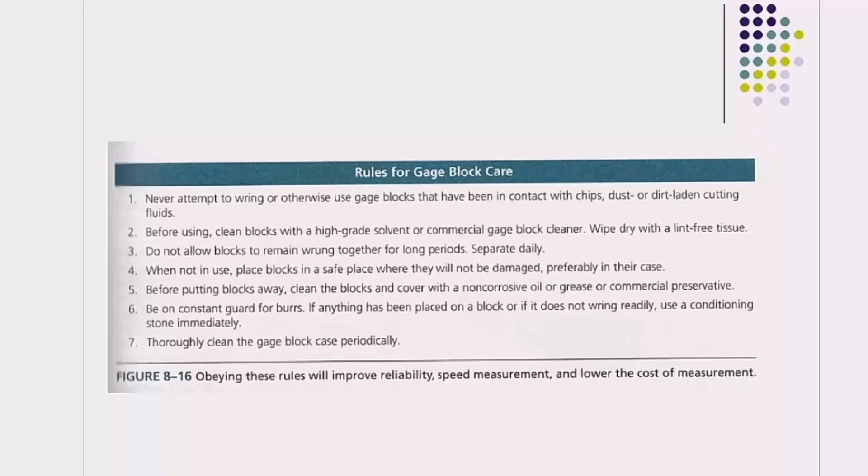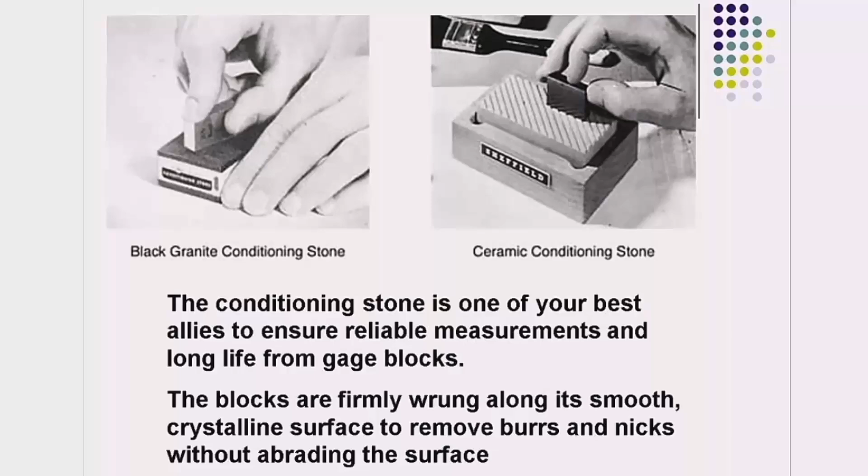The conditioning stone is one of your best allies to ensure reliable measurements and long life from gauge blocks. They are used to remove fine burrs from the edges of the gauge block. The blocks are firmly wrung along its smooth, crystalline surface to remove burrs and nicks without abrading or changing the flatness of the surface. You can see a variety of conditions will actually generate error when using gauge blocks.

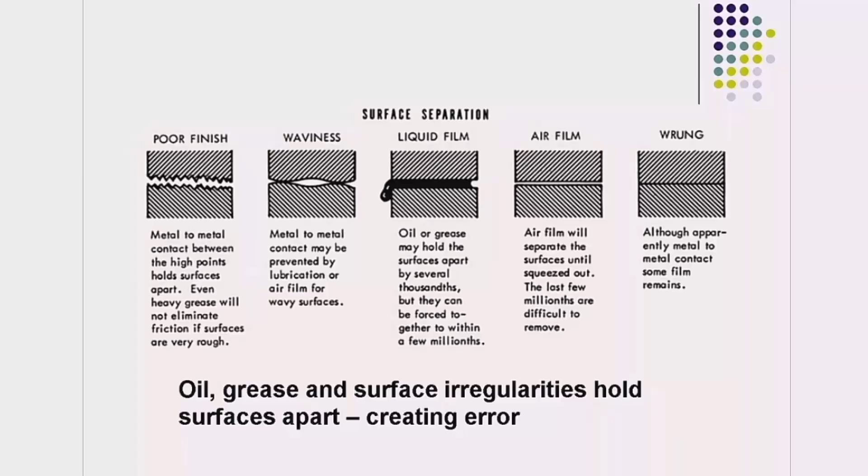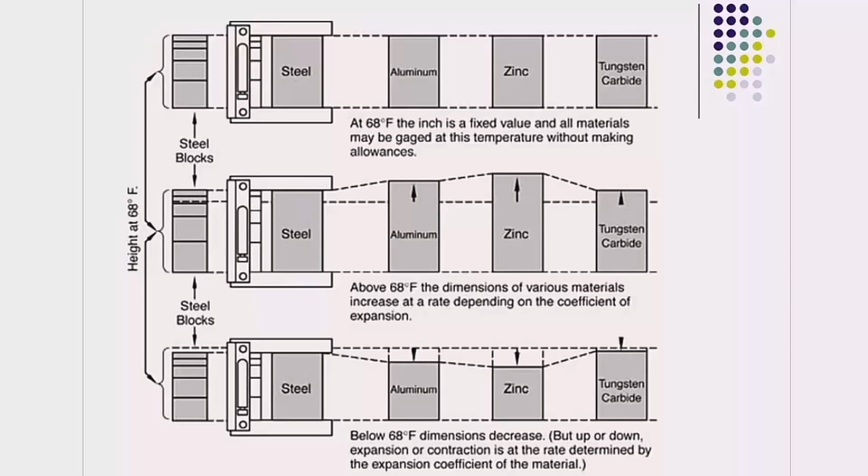These are all conditions you need to avoid, except for the properly wrung gauge blocks. Also, you have to be very careful when using gauge blocks with materials other than steel, because gauge blocks made of steel at different temperatures than standard will expand at the same rate as steel, but will not expand at the same rate as other materials such as aluminum, zinc, or even tungsten carbide. That's why it's important to measure at a specific temperature to avoid those errors, as seen in the previous video.

That's it for gauge blocks. You'll have an opportunity to use them later in the lab.